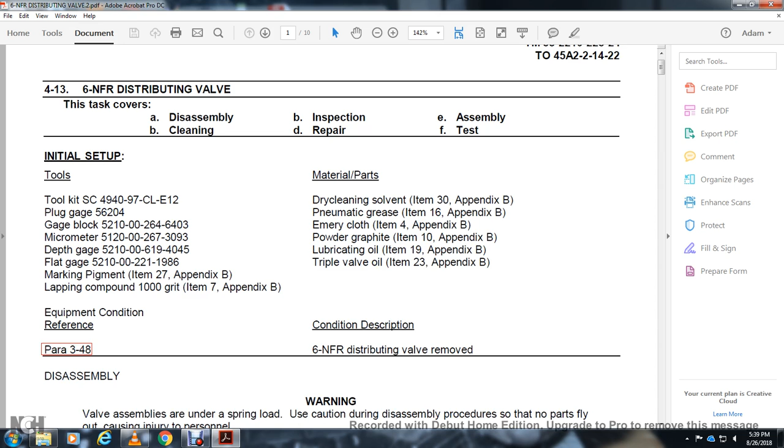Toolkit: plug gauge, block, micrometer, depth gauge, flat gauge, marking pigment, lapping compound (1000 grit), equipment reference material, parts dry cleaning solvent, pneumatic grease, emery cloth, powder graphite, lubricating oil, triple valve oil. Condition/description: 6-NFR distributing valve removed.

Warning: valve assemblies are usually under spring load. Use caution during the disassembly procedure so that no parts fly out and cause injury to personnel.

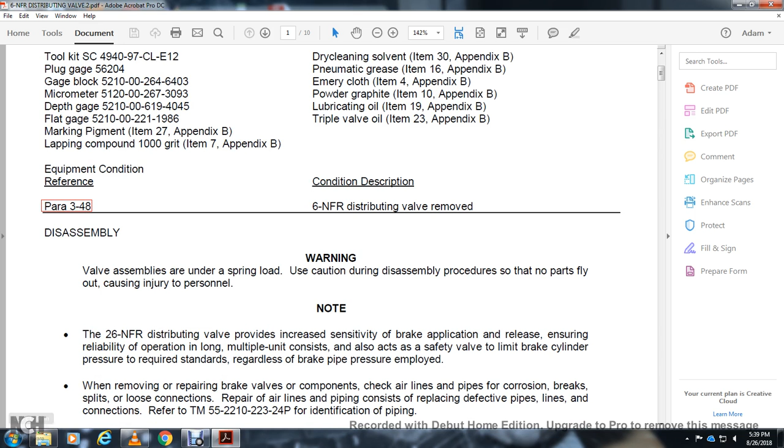Note: the 26-NFR distributing valve produces increased sensitivity of brake application and release, ensuring reliable operation in long multiple unit consists. It also acts as a safety valve, limiting brake cylinder pressure to the required standard regardless of the brake pipe pressure employed. When removing and repairing brake valve components, check air lines and pipes for corrosion, breaks, splits, and loosened connections.

Repair all lines and pipelines, consisting of replacing defective pipelines and connections. Refer to TM 55-2210-223-24P for identification of piping.

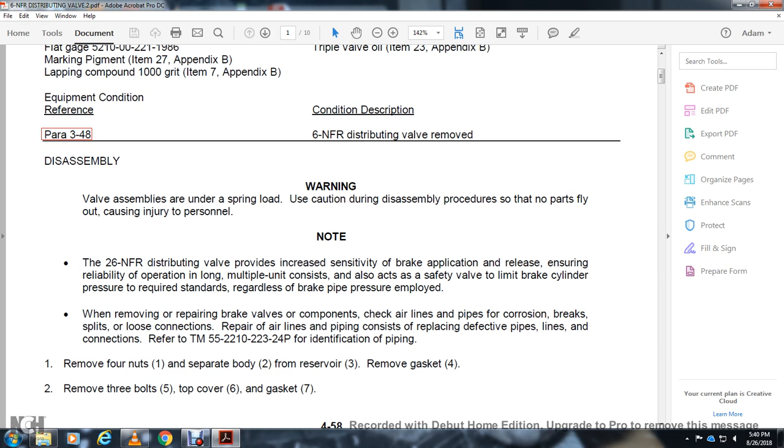Remove 4 nuts (1), separate (2) from the reservoir, (3) remove the gasket, (4) remove the 3 bolts, (5) top cover, (6) and gasket (7). Remove the spring (8), remove the check valve carrier assembly (9).

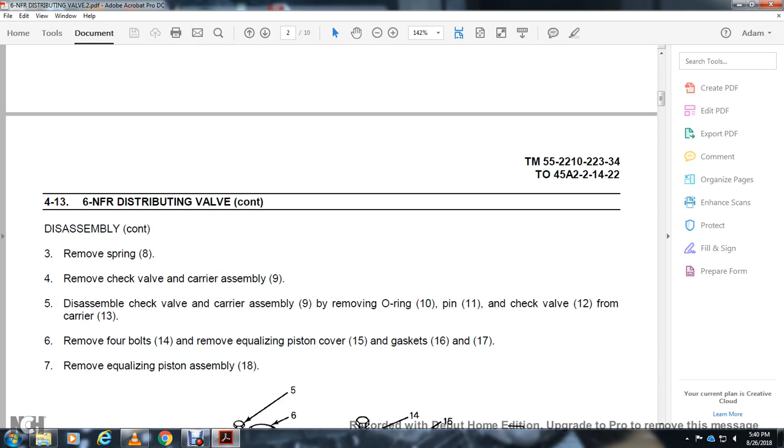Disassemble the check valve carrier assembly (9) by removing the O-ring (10), pin (11), check valve (12) from carrier (13). Remove 4 bolts (14), removing equalizing piston cover (15), gaskets (16) and (17). Remove equalizing piston assembly (18).

Disassemble equalizing piston assembly (18) by the following: remove 2 lock pins (19), 2 spring pins (20), spring (21), slide valve (22), graduating valve (23), spring (24).

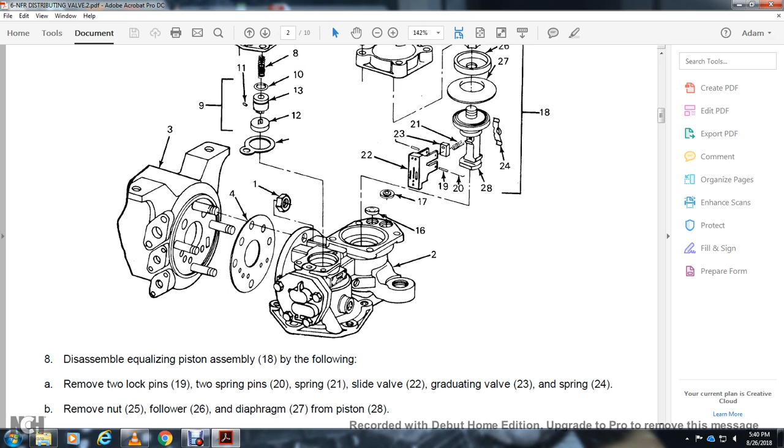Remove nut (25), follower (26), diaphragm (27) from piston (28). Remove 4 bolts (29), slide valve stop (30), gasket (31), O-ring (32), gasket (33).

Remove 5 bolts (34), bottom cover (35), gasket (36). Remove large diaphragm piston assembly (37).

Disassemble large diaphragm piston assembly (37) by the following: remove nut (38), follower (39), diaphragm (40), piston head (41), piston spring (42).

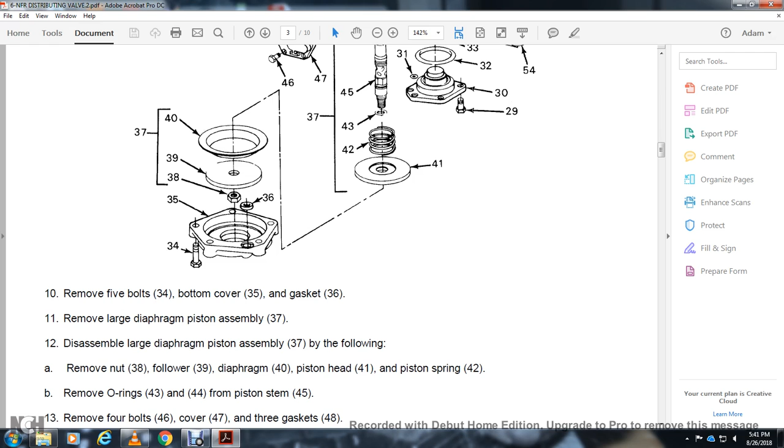Remove O-rings (43) and (44) from piston stem (45). Remove 4 bolts (46), cover (47), 3 gaskets (48).

Remove safety valve (49), screen (50), (51), strainer (51), gasket (52), adapter (53), O-ring (54).

Cleaning and inspection. Warning: dry cleaning solvent PD680 is toxic and flammable. Wear protective gloves and goggles. Use only in well-ventilated areas. Avoid contact with skin and eyes, and don't breathe vapors.

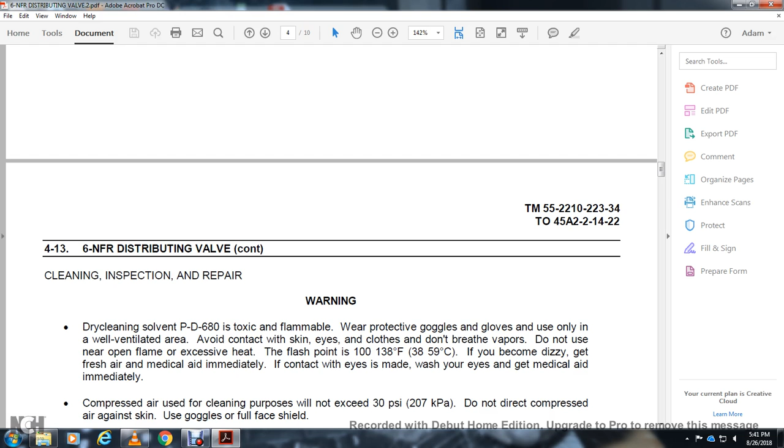Do not use near open flame or excessive heat. Flash point is 100 to 138 degrees Fahrenheit. If you become dizzy, get to fresh air and seek medical aid immediately. If contact with eyes occurs, wash your eyes and get medical aid immediately.

Compressed air used for cleaning purposes will not exceed 30 psi. Do not direct compressed air against skin. Use goggles or a full face shield.

Use a cloth dampened with dry cleaning solvent and remove the grease and oil film from the exterior and interior of the body. Dry clean metal parts using dry cleaning solvent, then dry with compressed air. Inspect metal parts for cracks, breaks, cuts, and other damage.

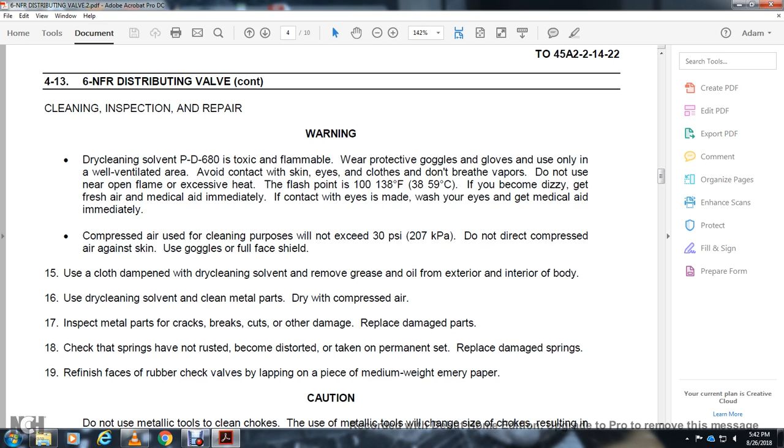Replace any damaged parts. Check if springs have rusted, become distorted, or taken on a permanent set. Replace damaged springs. Refinish the faces of rubber check valves by lapping on a piece of medium weight emery paper.

Caution: do not use metallic tools for cleaning chokes. Using metal tools will change the size of the chokes, resulting in failure of the brake valve system. Note: to avoid misplacement of the chokes, remove and replace one choke plug at a time.

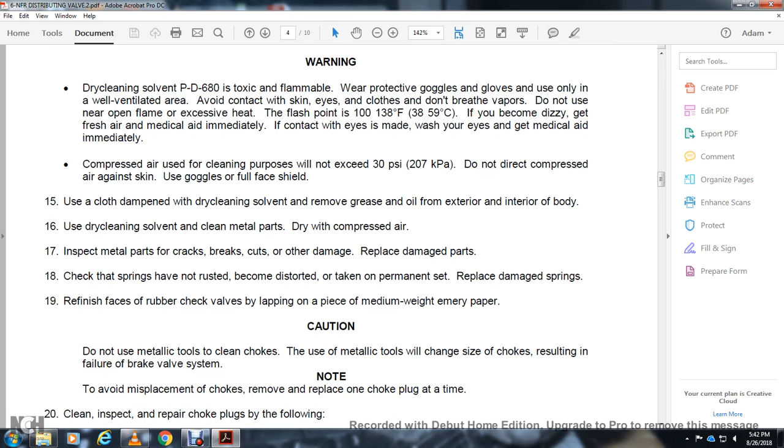Clean, inspect, and repair choke plugs by the following: remove choke plug and place in dry cleaning solvent. Inspect the choke plug passages for cleanliness. Use compressed air to remove foreign material.

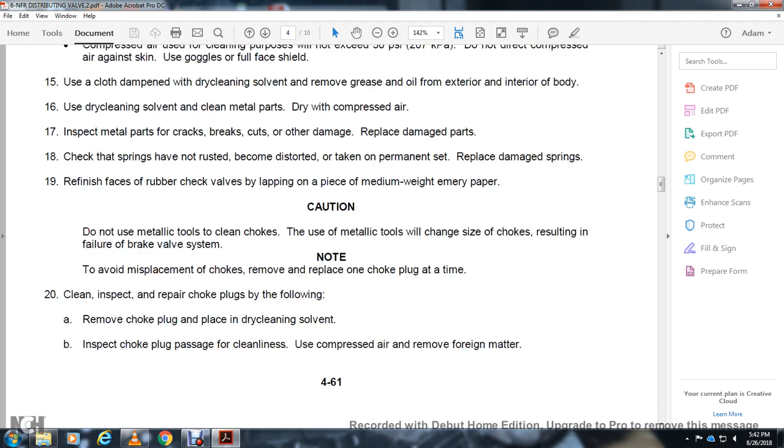Cleaning, inspection, and repair continued: remove the choke plug from the dry cleaning solvent and dry with compressed air. Check that the choke plug is clean and unrestricted. Lightly coat the threads of the choke plug with a compound consisting of 1 part graphite, 2 parts oil.

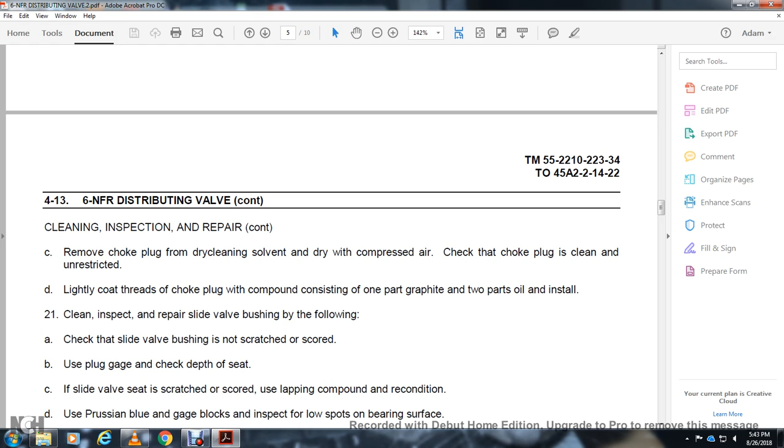Clean, inspect, and repair the slide valve bushing by the following: check that the slide valve bushing is not scratched or scored. Use a plug gauge to check the depth of the seat.

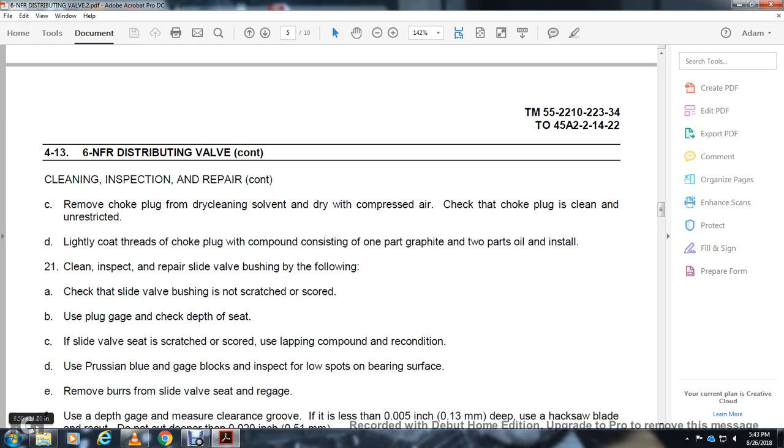If the slide valve seat is scratched or scored, use lapping compound to recondition it. Use Prussian blue and a gauge block to check for low spots on the bearing surface. Remove burrs from the slide valve seat and re-gauge.

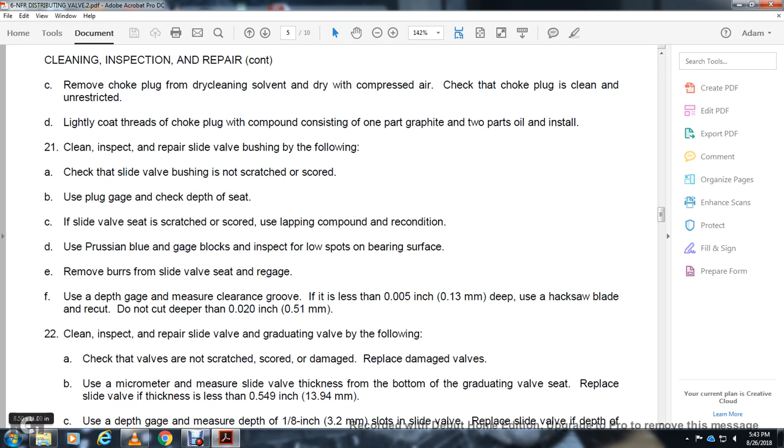Use a depth gauge and measure the clearance groove, with less than 5 thousandths of an inch deep use a hacksaw blade. With a recut, do not cut deeper than 20 thousandths of an inch.

Clean, inspect, and repair the slide valve and graduating valve as follows. Check that the valves are not scratched, scored, or damaged. Replace the valve if damaged.

Use a micrometer to measure the slide valve thickness at the bottom of the graduating valve seat. Replace the slide valve when the thickness is less than 549 thousandths of an inch.

Use a depth gauge and measure depth of 1/8 of an inch slots on the slide valve. Replace the slide valve if the depth of the slot is greater than 93 thousandths of an inch.

Use a flat gauge to check the thickness of the graduating valve. Gauge the graduating valve against the limits.

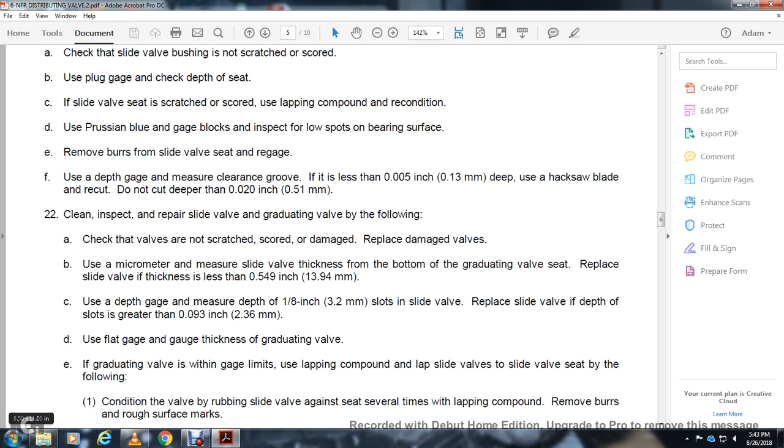Use lapping compound to lap the slide valve with the slide valve seat as follows. Condition the valve by rubbing the slide valve against the seat several times with the lapping compound to remove burrs and rough surface marks.

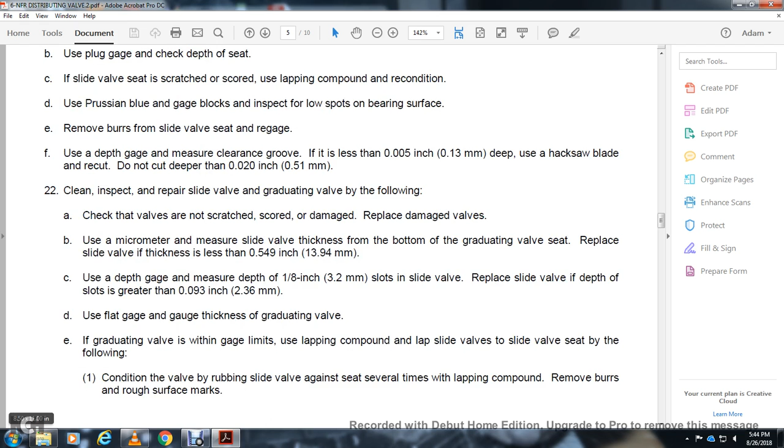Warning: compressed air used for cleaning purposes will not exceed 30 psi. Do not use compressed air against skin. Use goggles or a full face shield. Use the compressed air to remove foreign particles from the cavities.

Regauge the graduating valve and check that the piston is not bent. Use a micrometer to measure the diameters and two guides on the piston. Replace the piston if its diameter is greater than 1.733 inches.

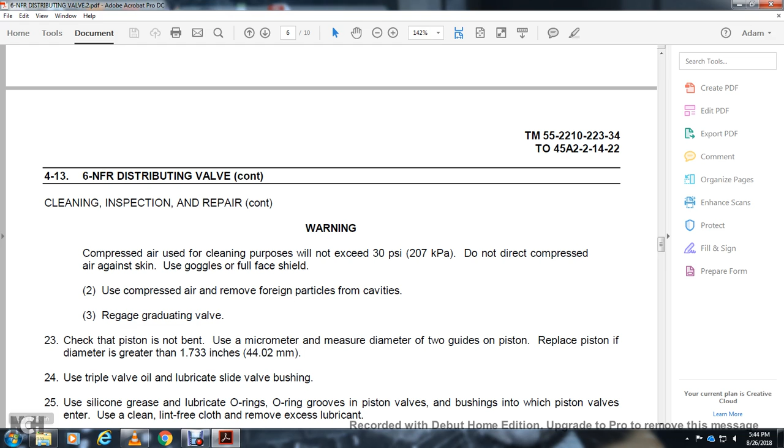Apply triple valve oil and lubricate the slide valve bushing. Use silicone grease and lubricate O-rings and piston valve bushing into the piston valve, and use a clean, lint-free cloth.

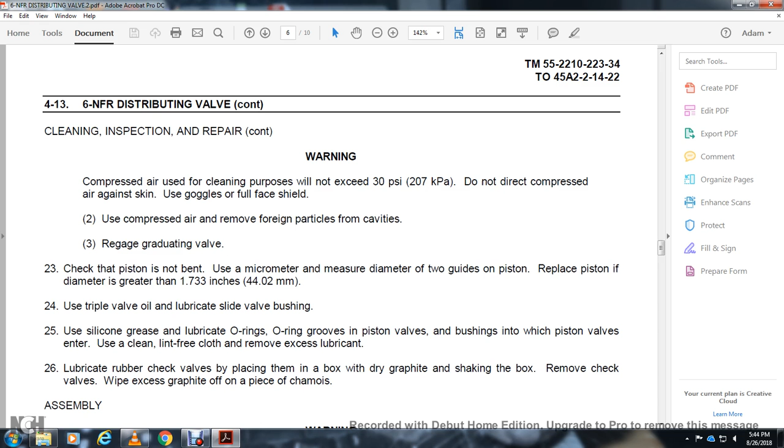Remove excessive lubrication. Lubricate the rubber check valve by placing it in a box with dry graphite, shaking the box, and removing the check valve. Wipe excessive graphite off with a piece of chamois.

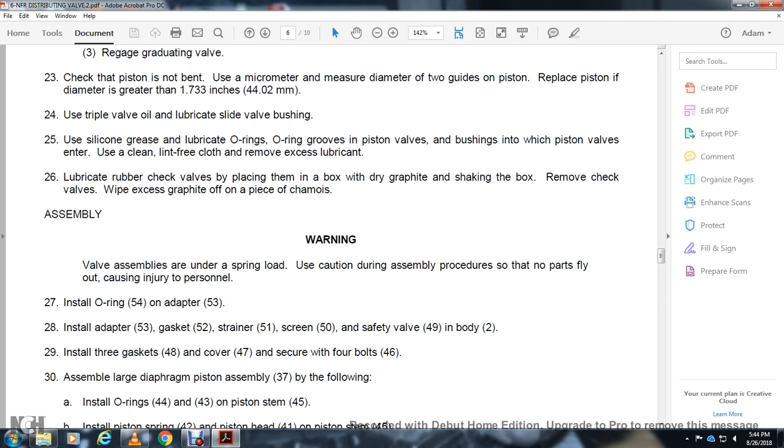Assembly warning: valve assemblies are under spring load. Use caution during assembly procedures so that no parts fall apart or fly out, causing injury to personnel.

Install O-ring 54 on adapter 53. Install adapter 53, gasket 52, strainer 51, screen 50, and safety valve 49 in body 2. Install gasket 48 and cover 47, and secure with 4 bolts 46.

Assemble the large diaphragm piston valve assembly 37 as follows. Install O-rings 44 and 43 on piston stem 45. Install the piston spring 42 with the piston head 41 on the piston stem 45.

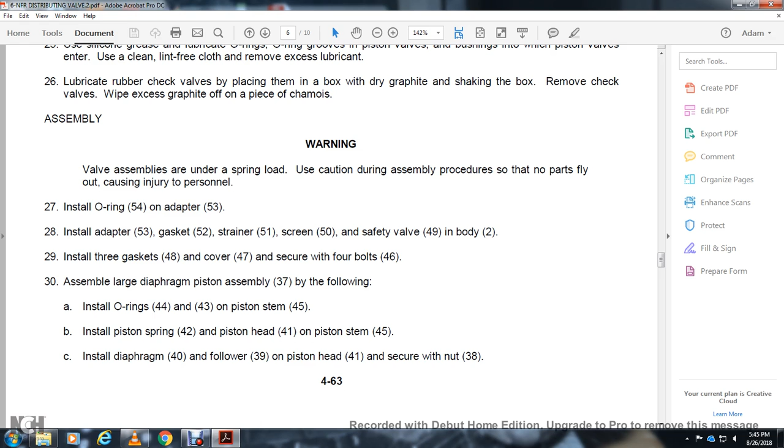Install diaphragm 40 and follower 39 on piston head 41, and secure with nut 38. Install the large diaphragm piston assembly 37 into body 2.

Install the gasket 36 and the bottom cover 35, and secure with 5 bolts 34.

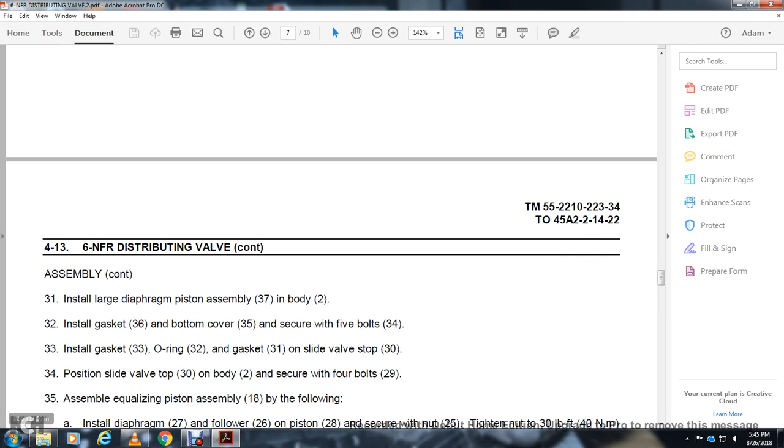Install gasket 33, O-ring 32, and gasket 31 on the slide valve stop 30. Install the piston slide valve top 30 on body 2, and secure with 4 bolts 29.

Assemble the equalizing piston assembly 18 as follows. Install the diaphragm 27 with the follower 26, the piston 28, secure with nut 25, and tighten the nut to 30 pound-foot torque.

Install graduating valve 23 on slide valve 22, install spring 24 in the recess of the graduating valve, and install piston 28 on slide valve 22.

Check that spring 24 is seated into the recess of the piston stem. Holding slide valve 22 and piston in position on piston 28, install spring 21 on the piston stem, and secure with 2 spring pins 20 and lock pins 19.

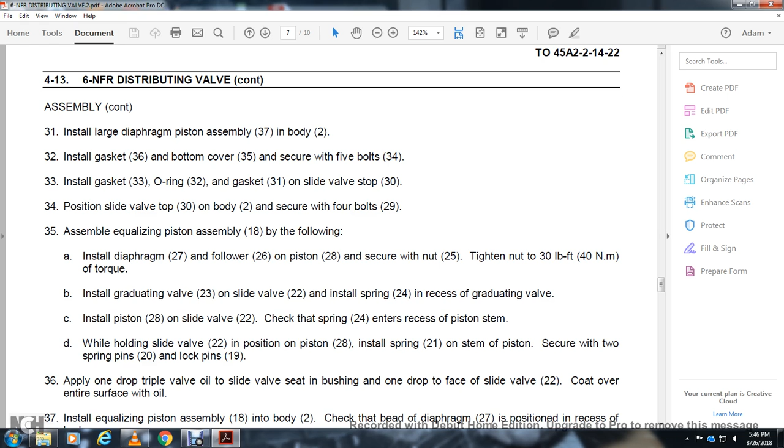Apply 1 drop of triple valve oil to the slide valve seat within the bushing, and 1 drop on the face of the slide valve 22. Coat the entire surface with oil.

Install the equalizing piston assembly 18 into body 2. Check that the bead of diaphragm 27 is in position in the recess of the body. Install gasket 17, 16, equalizing piston cover 15, and secure with 4 bolts 14.

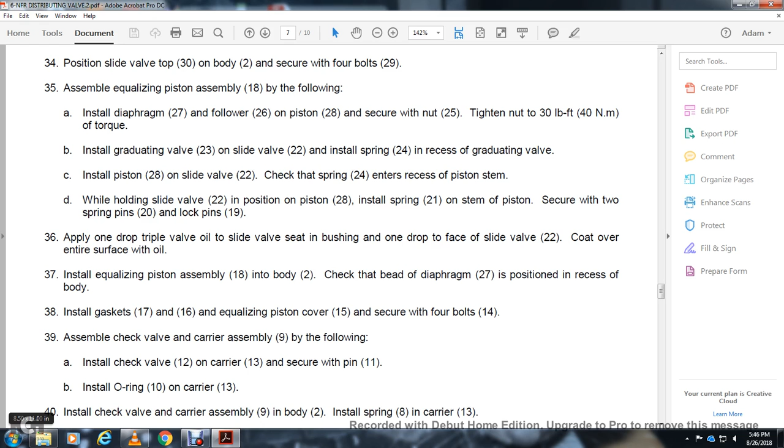Assemble the check valve with the carrier assembly 9 as follows. Install check valve 12 with carrier 13, secure with pin 11, and install O-ring 10 on 13.

Install the check valve with carrier assembly 9 into body 2, install the spring 8 into carrier 13, install gasket 7, top cover 6, and secure with 3 bolts 5.

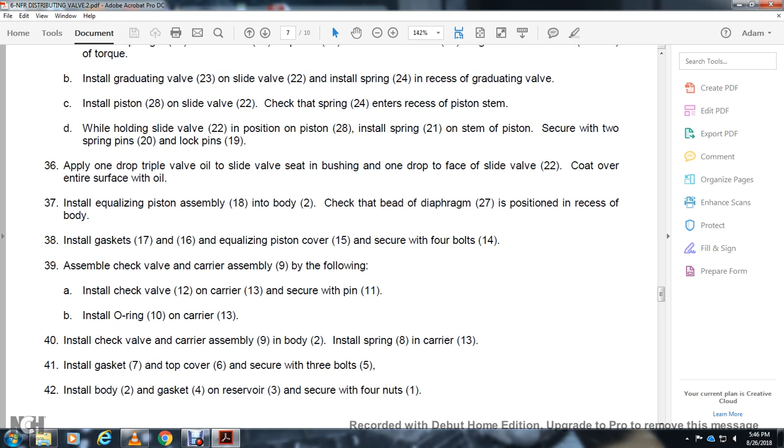Install body 2, gasket 4, on reservoir 3, and secure with 4 nuts 1. Test: test the 6 NFR distributing valve according to test specification NYT-460.

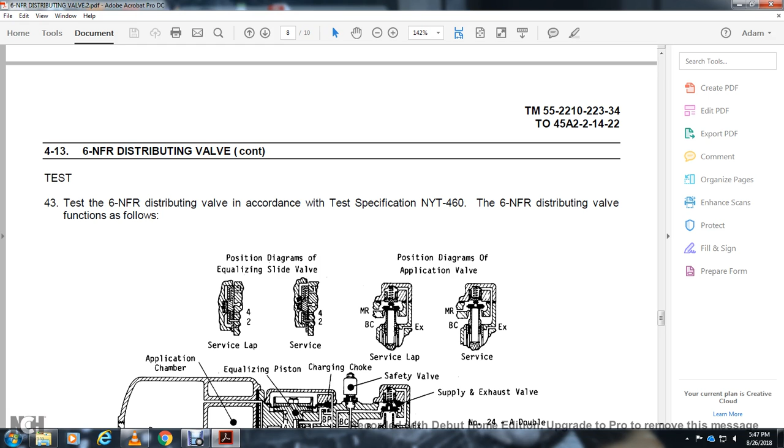During charge and release, the 6 NFR distributing valve functions after the brake pipe flow within the outer face of the equalizing piston diaphragm, forcing the piston slide valve to the release position. Air in the brake pipe flows through the charging choke with the equalizing slide valve to the pressure chamber, charging the brake pipe pressure.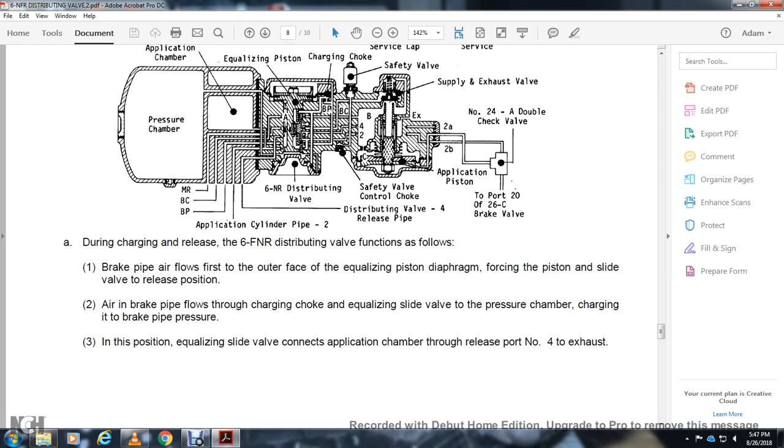In this position, the equalizing slide valve connects the application chamber through port number 4 to the exhaust. Application cylinder of the outer face, application piston, exhausted V with the passage 2A through the number 24A double check valve with the passages 26 and 2 and 4, then the distributing valve exhaust.

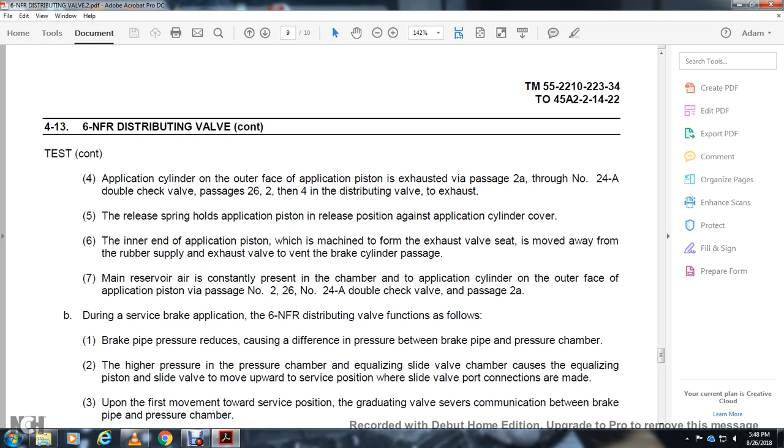During the service brake application, the 6 NFR distributing valve functions as follows: the high pressure of the pressure chamber causes the equalizing piston slide valve to move upward in service position while the slide valve port connections are made. Upon the first movement toward the position, the graduating valve severs communication between the brake pipe and the pressure chamber. The communication between the pressure chamber and passage 2 is then made, allowing the pressure chamber air to flow to the application chamber, the application cylinder, outer face of the application piston, via passages 2 and 26, 24A double check valve.

Pressure that developed in passage 2 and the application cylinder, outer face of the application piston causes the piston to move upward against the force of the release spring, first seating against the exhaust seal seat on the underside of the supply exhaust valve, then raising the valve off the supply seat to allow main reservoir air to flow to the brake cylinder cavity B through passage BC.

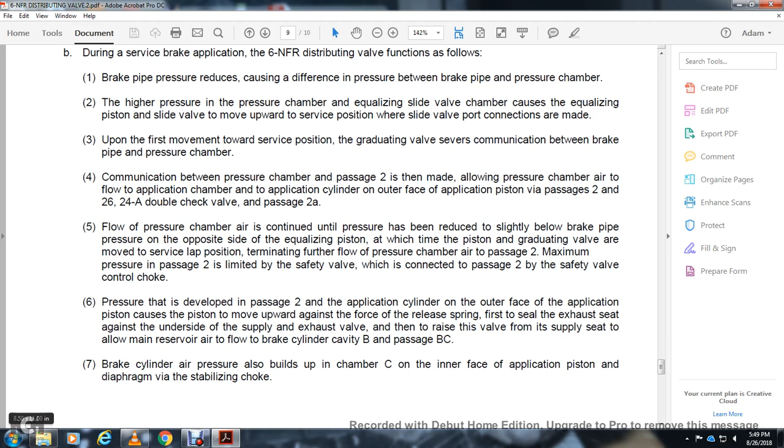Brake cylinder air pressure also builds up in chamber C on the inner face of the application piston diaphragm V through a stabilizing choke. As brake cylinder pressure in chamber C approaches the application cylinder pressure on the outside of the diaphragm and piston, the application piston moves downward to allow the supply and exhaust valve to seat. The supply valve seats to terminate further flow of main reservoir air to the brake cylinder.

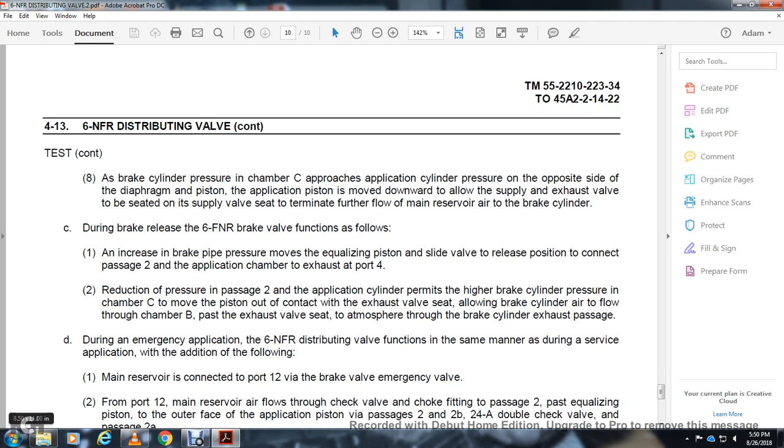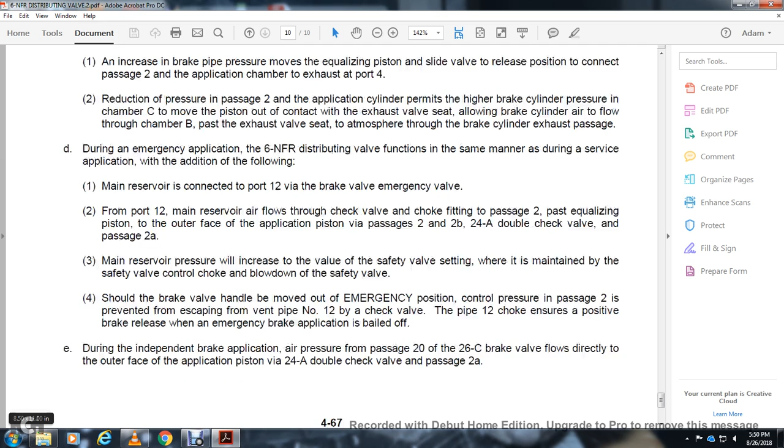During the brake release, the 6 NFR valve functions with the increase of the brake pipe pressure, moving the equalizing piston slide valve to the release position to connect the application chamber passage to the exhaust port. Reduction of application cylinder pressure permits the higher brake cylinder pressure in chamber C to move the piston out of contact with the exhaust valve seat, allowing brake cylinder air to flow through chamber B past the exhaust valve seat into the atmosphere through the brake cylinder exhaust passage.

During the emergency application, the 6 NFR distributing valve functions in the same manner as during the service application, in addition to the following. The main reservoir is connected to port 12 of the brake valve through the emergency valve. From port 12, main reservoir air flows through the check valve choke fitting to passage 2, past the equalizing piston, to the outer face of the application piston via passages 2 and 2b, the 24A double check valve and passage 2A. Main reservoir pressure will increase to the safety valve setting, where it's maintained by the safety valve control choke with the blow down safety valve.

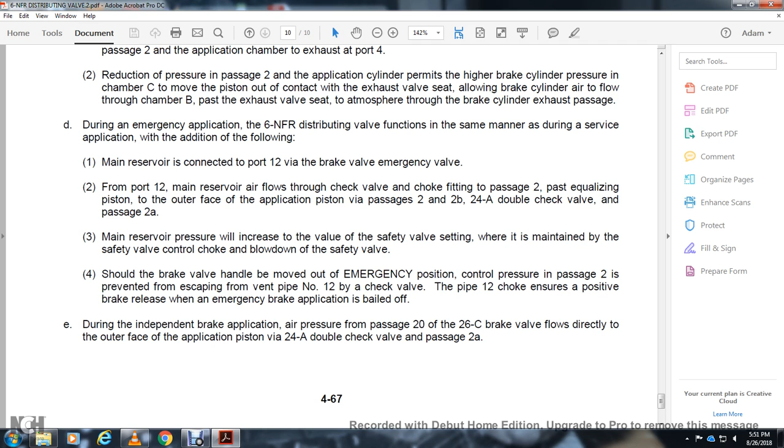Should the brake valve handle be moved out of emergency position, control pressure in passage 2 is prevented from escaping through the vent pipe number 12 by the check valve with the pipe 12 choke. This ensures the brakes release when the emergency brake application is bailed off. During the independent brake application, air pressure from the 26C brake valve flows directly to the outer face of the application piston V through the 24A double check valve and passage 2A.

All right, that was the 6 NFR distributing valve, part 2.